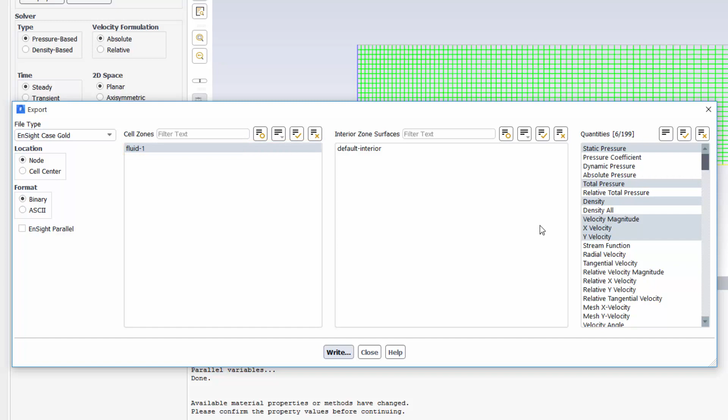I select EnSight Case Gold under File Type. The fluid zone should be highlighted by default. Under Quantities, I'll choose the variables I'd like to export out for the continuous phase that will be written out. I'll select Write. In my current directory, 3 files are present for the particles, a PDF, CAS, and DAT file.

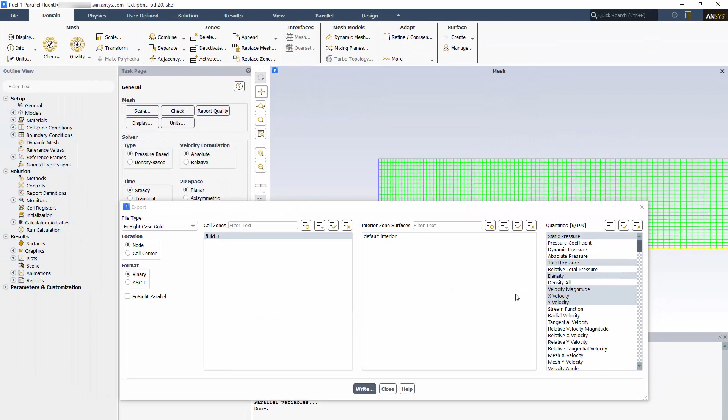I'll use lfuel1 as the EnSight case file name. Looking at my directory, I can see multiple files have been exported out. Among them are the encas, geo, the scalar variables, and lastly, my velocity variable. This has written out the continuous phase. Now I'd like to write out the discrete phase.

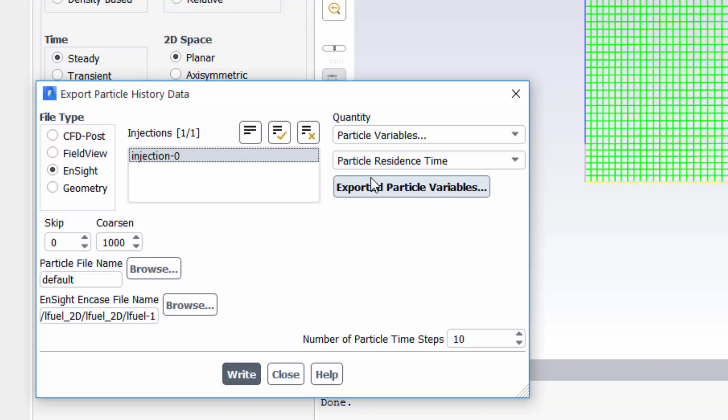I'll go to File, Export, and this time I'll select the particle history data. I'll write out the EnSight format and select the actual injection that I'll export out. I can export the particle variables by pressing on the Exported Particle Variables button. I can then select whichever particle variable I'd like to export out.

I'll select the particles for the x, y, and z velocity, velocity magnitude, diameter, density, mass, and temperature. I'll add those variables as the export and press OK. We can specify the EnSight encas file name which we just wrote, however, I am satisfied with the name I chose. I'll specify my particle file name as measured data.

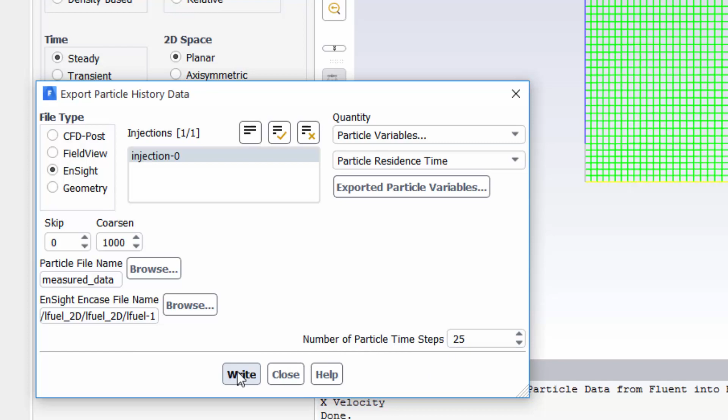I can also control the resolution and the time space as to the number of time steps that I'll write out. I'll input 25 and press on Write. Fluent will now export out 25 time steps of data for our measured data. I can now see that we have measured data 1 through 25. I also now have my scalar variables and vector information.

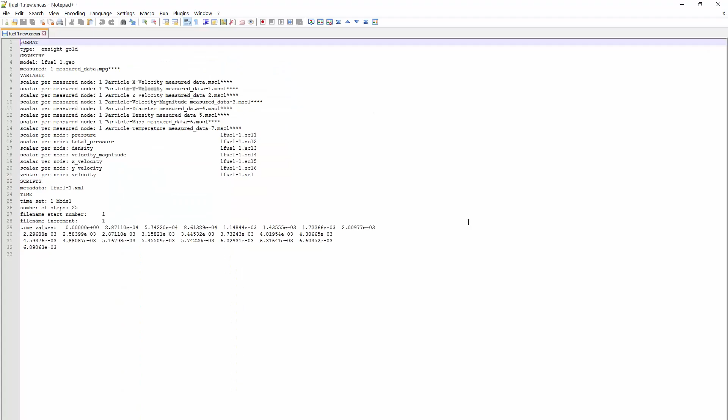I actually have a new encas file created. I'll open this new encas file to have a look at it. This new encas file has the measured data specified in it. It also has the scalar per measured node information and the 25 time steps I wrote out for the measured data. At this point, I can load the encas file straight into EnSight.

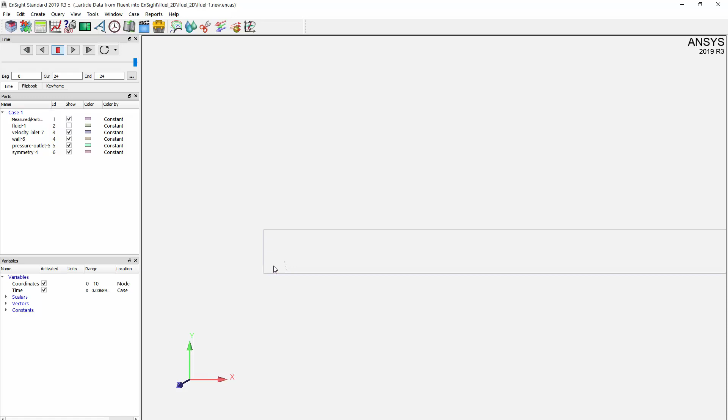Using the export capability in Fluent, I can export out directly the measured data for particles and have that straight into EnSight format. Therefore, there is no need to translate outside, and I'll automatically have the measured particle data right here available to me. To view this a bit better, I'll take off the sym plane. I can now see my particles, although they're quite small.

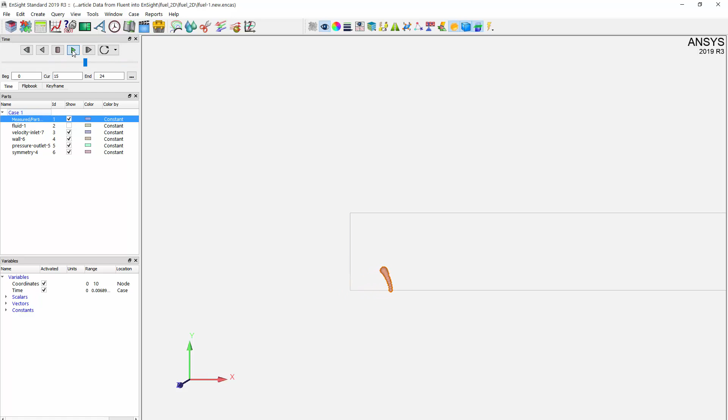I'll select the measured particle part and click on the node representation icon. I'll change the type to spheres and scale by a scalar. In this case, I'll scale by diameter and enter 1000. As I step through time, I can see the particles are getting smaller since they're actually evaporating out, which is why they're no longer visible at the last time step.

In EnSight, I can now visualize particles. I can take any one of these scalars, such as particle mass, and color these by that exact scalar. I'll then play them through time. I can see the particles getting smaller and their mass disappears away as they're evaporating in this particular model.

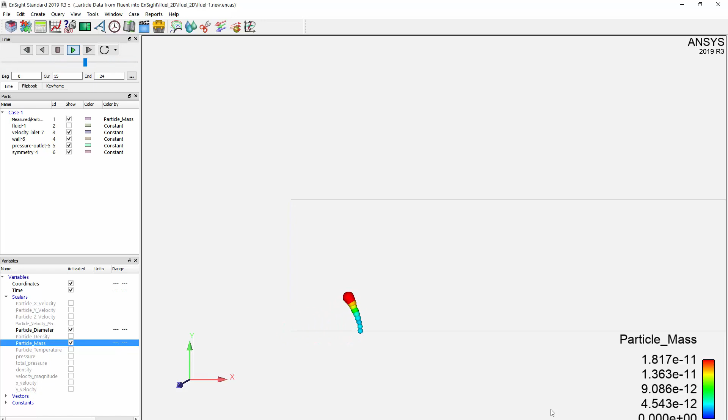This is a basic way of exporting out your particle data and your discrete phase data from a Fluent run and visualize it within EnSight. This concludes our demonstration on how to view Fluent particle data within EnSight.